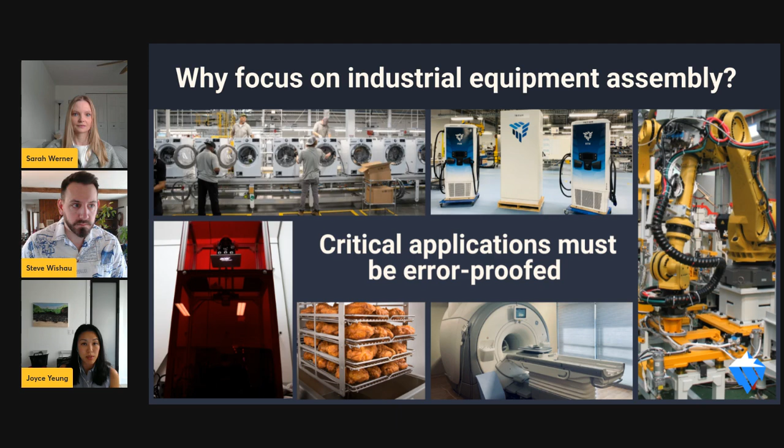Now let's talk about why we focused on industrial equipment assembly. It's a diverse application set, ranging from washers and dryers to box build assemblies, robotic arms, pressure fryers, MRI devices, additive manufacturing machines — huge, wide, diverse applications here.

They all share common characteristics in terms of being low volume, high complexity builds with lots of components. We felt there were a lot of use cases to demonstrate how to actually error-proof those applications, and we also created a guide to help industrial equipment manufacturers learn how to error-proof that.

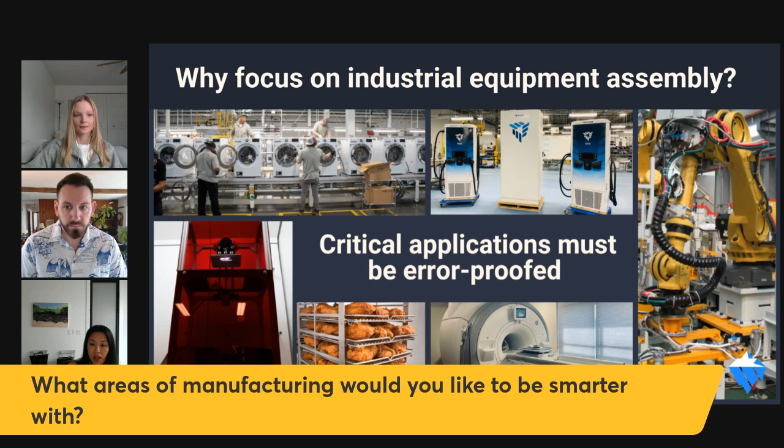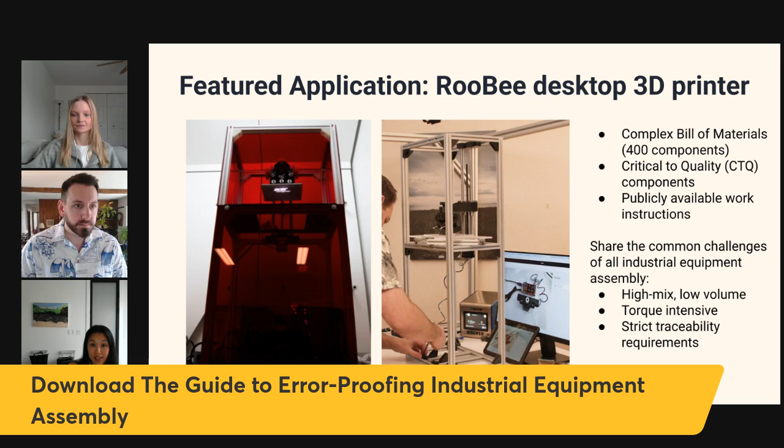Let's move on to the next slide and hone in on why we picked the application we did, which was a desktop printer. This is actually pretty cool because Steve and I both came from additive manufacturing, so this was very relatable to us. Steve, why don't you talk a little more about this?

Yeah, absolutely. This is a good application of the industrial equipment Joyce was mentioning. This is a home-built DLP, or projector-based resin system for 3D printing, a far cry from those that are commercially available on the market. But this is a really good example of why we want to make sure we document what we're doing appropriately, because this is a complex assembly.

There are hundreds of parts, most of them critical to quality components. Even those with filament printers at home may know that 3D printers and additive manufacturing can be very sensitive if things aren't quite tuned correctly — those little screws that level the build plate, make sure filament is coming through, or in this case, that our projector is getting the right image with the right pixel quality, available on the instructions here. It's all available here because we want to make sure we're doing things correctly.

So these are very sensitive pieces of equipment, ranging from additive manufacturing all the way up to those examples Joyce walked through. But we picked the RooBee desktop 3D printer here because it had a publicly available set of work instructions for us to base this content on. This is not a roast of the RooBee printer by any means — it was a publicly available set of instructions. It's a great piece of equipment, and we wanted to do it justice.

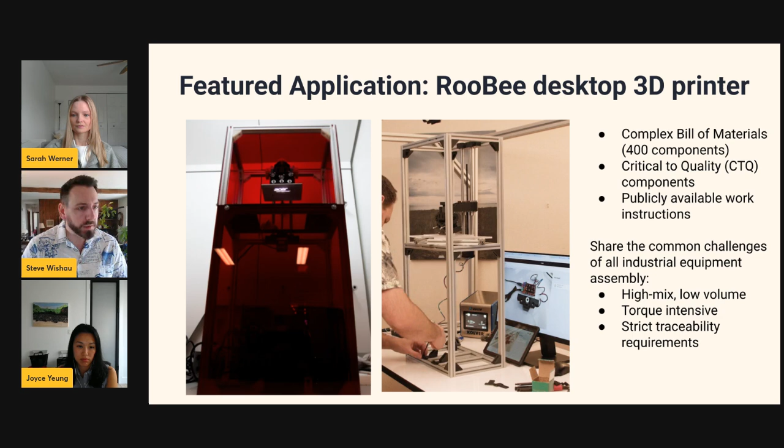So on the next slide, we're going to start talking about some of those improvements that we made to the content overall. When we talk about the instructions here, we want to make sure we're improving on what is available. You can see these instructions available online - it's dozens of pages, an infinitely scrolling PDF essentially.

I know a lot of you have SharePoint or the equivalent PowerPoint versions that you've downloaded or exported to PDF, or have these instructions available on the production floor. It's a very good example of those dusty binders that are sitting out there. There's a bunch of content, potentially disorganized, and there's a lot of text.

It's really important to have this as a reference for your ISO 9001 or even more - concretely, the AS 9100 for aerospace or 13485 ISO for med device. This is all a very thorough documentation method, but it's really hard to quickly find that information right away. There's a limited set of information, no videos, no linked content, which I'll explain in a little bit, or communication with other systems.

This is, again, an example of a PDF, but we want to make sure we have this content available to enable those operators to be successful. I'll show what that means on the next slide.

Hey Steve, just pause real quick. I think it's also worth pointing out to some people listening in, they might actually think - if we go back to the previous slide - they might think those work instructions look good because at least there's colorful images and there's more than one.

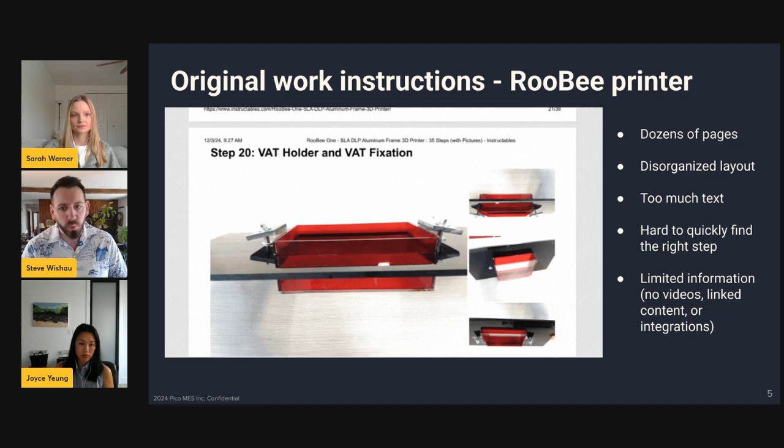Exactly. You can look up these instructions and see more examples on the RooBee Instructables as well. But there's potentially a dozen pictures for each one of these steps, and the content is there - but what is the order of the content? How do we make sure we're doing things in the right direction? Which picture is actually the most important? Which ones are references? When we have this type of content and structure, it's really hard to discern what the most important thing is versus here's a bunch of extra stuff in case you forgot something.

So when we talk about these work instructions, this text is really important to highlight those differences. There's still a lot of text in both scenarios, but it really highlights that section of what do we want to do first, what do we want to do second, etc. This content of putting the text blob is good for being extremely thorough, but it really helps differentiate between today's my first day on the manufacturing floor, or it's the end of the quarter and I'm shifting over from shipping to help my assemblers, versus I've built this thing a bunch of times and I just need a reference.

This clear, concise structure allows us to document both here's all the information, and here's the sequence if I forgot what step 3 or 4 is - I need to just reference that very quickly. So organizing and changing that text to be more clear and concise, even if we're doing all this in the same step, really helps us call out exactly what we're trying to accomplish in the right sequence.

And then also to chime in here, Steve - we did a whole webinar on this for anyone tuning in that wants more examples. Becca Resnick, who's an expert in work instructions for all industrials, outlined multiple examples of what good, better, best looks like when it comes to work instruction writing. So we'll pop that down here in the comments as well for reference.

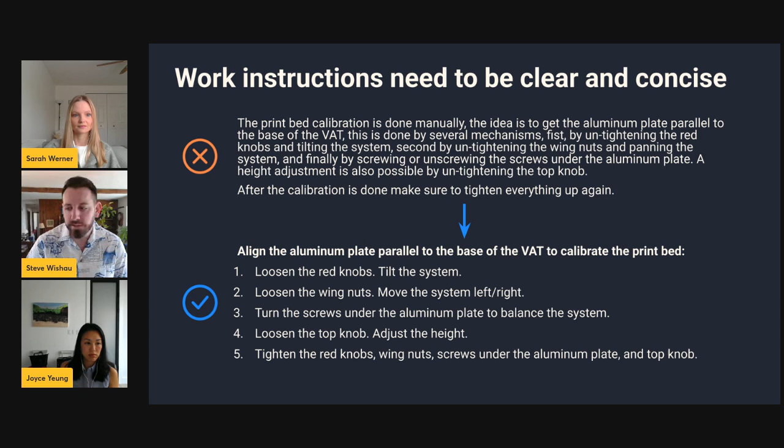Yeah, it's my favorite webinar that we've done at Pico, just because of how valuable that content is. Even if we're starting small, we'll reference those things later on for what we can do to get started. We want to make sure this content is accessible for everyone that needs it and really documents what we're trying to do. The next slide is a great example of this because we're calling out specific features as needed.

So when we're building our work instructions, we want to have these tools accessible and familiar. This is very similar to tools like PowerPoint, Google Slides, because we want to enable our manufacturing or process engineers to set up the instructions as they're used to seeing them, but present it to the operator in a way that makes the most sense.

So when we annotate those images, it's not just the lines, the arrows, which is a good baseline - but when we layer in those sequential steps, we can layer in hyperlinks for additional images and pictures, integrate to an ERP for a reference bill of materials and work orders. We can really queue up that structure to say what are we doing in the right order, and have that content available.

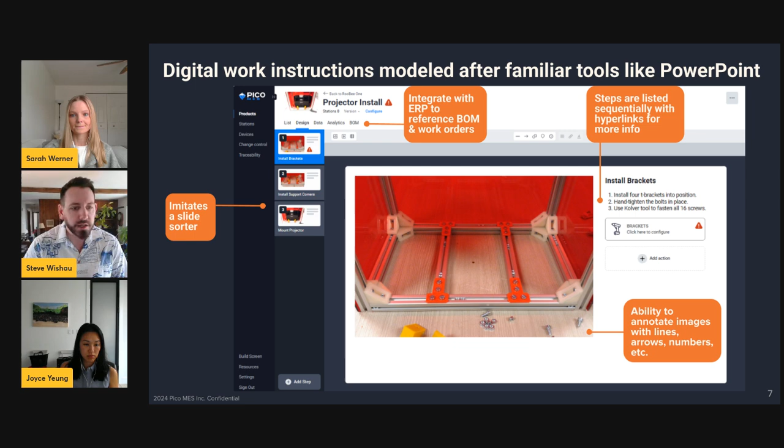For example, if I'm looking to install those 4 brackets, I can link a picture directly to that text. When I click on that text, it'll pop up an image and really highlight exactly what I'm trying to do. Again, it's a good reference, but it stays out of the way for people that might not necessarily need that content over and over. We tried to not be overwhelming, but still give the content that's needed, while still having that high level information we'd expect to see in ISO 9001 or other quality documentation environments.

As we transition from what these work instructions look like, we need to integrate other aspects of our technology stack, both hardware and software, to enable that, because it's not just work instructions or worker guidance. If we want to really start talking about error proofing or other items as we document our process, we need those tools available from other hardware and software sets to document that.

When we talk about integrating smart IoT tools, we've got a pre-populated device library available to make sure that repeated work is done out of the way.

So when we're doing an assembly, we can make sure that the bolts are in the right place, or that we've torque marked accordingly, or that there's no defects or other quality issues.

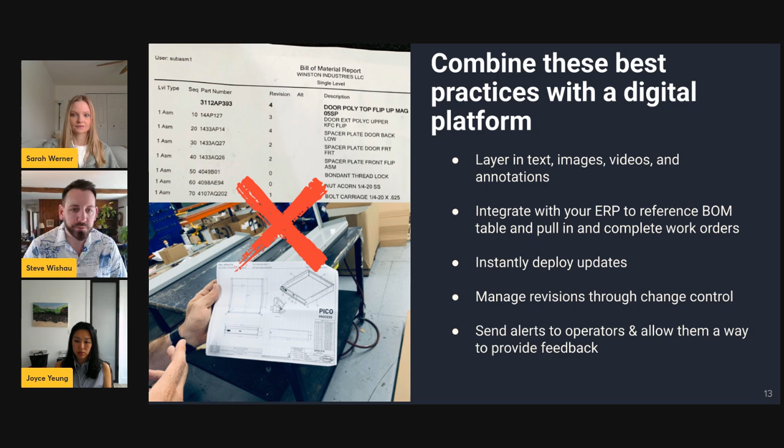Then finally, an interaction point of sending those alerts and making sure the operators can provide feedback, that I've got quality instructions and I want to make sure that I can give feedback accordingly.

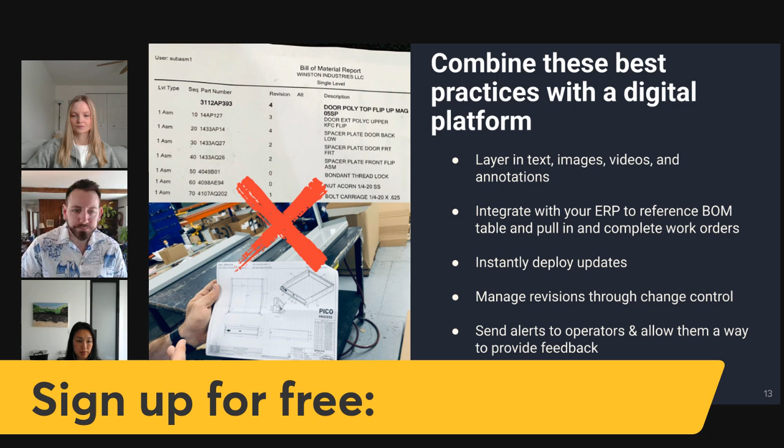Before we start wrapping up, I want to talk about the high level factory from scratch idea. I know a lot of you are in a system where there's maybe a home-built ERP, a home-built MES, some legacy software that you're working with, or there's processes you like or don't like. When we're talking about starting over from scratch and building a new factory, or if you had a blank slate, what would you do? What are those current systems that you have that you would actually carry over?

I know in my past life I've run a few different factories. There's aspects that probably worked pretty well, we have those reporting aspects and that content, but we have paper checklists and an ERP that doesn't transact directly from the shop floor. My operators have to do repeated work by doing my job, writing everything down, and then going to tell the computer what I did throughout the course of my shift. That's a lot of added time where it just doesn't get us to where we want to be for the factory of the future, right?

There's a lot of Industry 4.0, Industry 5.0 talk about AI, but if we're doing AI baselines on bad information or an ERP that doesn't have good information, we're just copy and pasting bad information and not doing the right level of learnings and expectations. So when we talk about a system like Pico, even in the example of the digital 3D printer, we want to make sure we're establishing those good behaviors right away. So even if I'm starting small or only collecting a little bit of information, I know my data baseline is good, so I can actually start leveraging those next-gen technology efforts on top of it, because it's coming straight from the source of truth from all the tools doing the manufacturing, and has a high level of operator adoption because it's easy to use and stays out of their way, while making sure our baseline is confident and good.